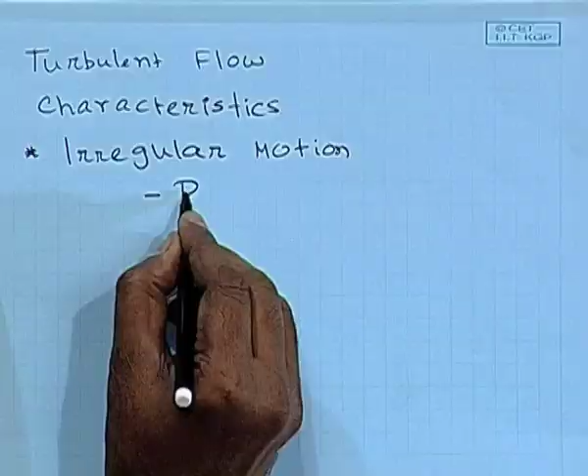The turbulent flow, and first we will do some introduction of turbulent flow. Now, let us look into some of the characteristics of turbulence. First one, it means irregular motions. Turbulence is basically an irregular motion, and there are random fluctuations of the velocity field with respect to time.

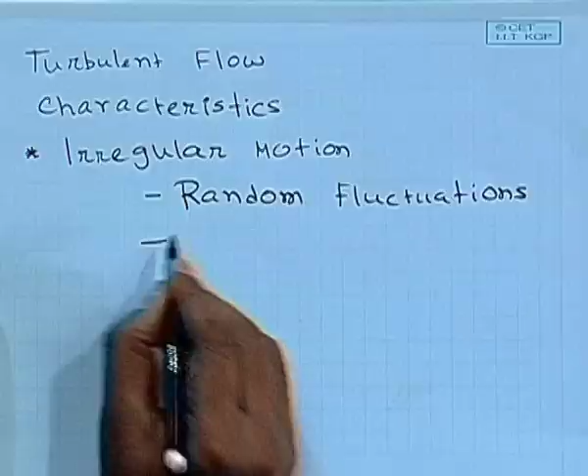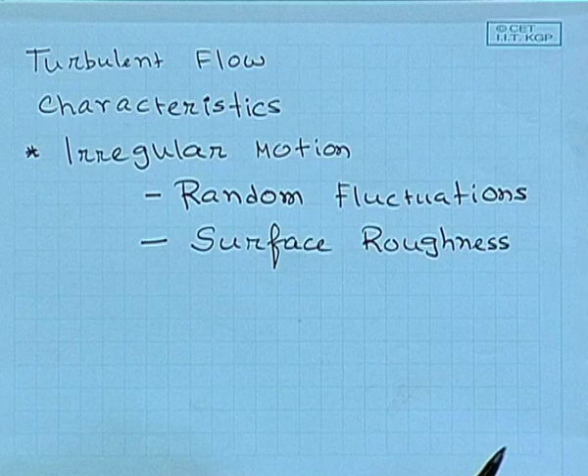Now, what are the origins of these random fluctuations? It may come from the surface roughness. What is the surface? It is basically the confining conduit through which the flow is occurring. It is basically the wall surface roughness. And secondly, the fluctuation may be due to the difference in velocity of the adjacent fluid layers.

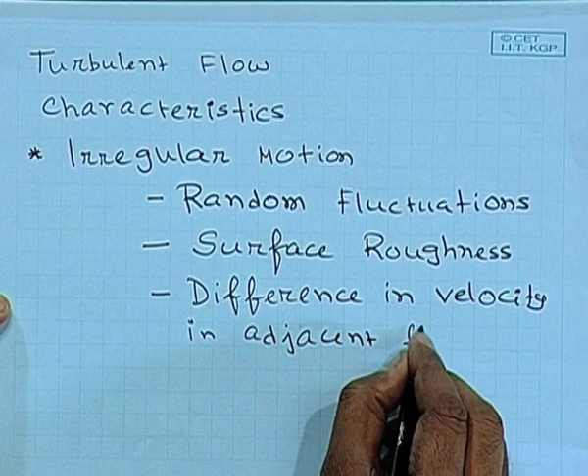Okay. Now, this fluctuation can grow with time or it can decay with time. Under what condition will it decay with time? The viscous forces may dampen the fluctuation. Close to the wall, it is highly expected that the eddy currents in the turbulent flow will be less prominent and the viscous forces will be dominant.

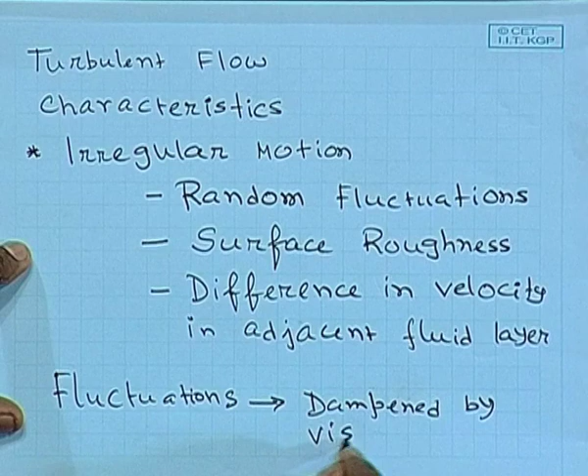Okay. So fluctuations may be dampened by viscous forces, or it may be magnified. How does it get magnified? It may take energy from the free stream velocity and the fluctuation may grow with time.

Okay. Now, how do we understand whether the fluctuation will be dampened, and what is the quantitative criterion by which you can say it is a turbulent flow? Whether the irregular fluctuation will increase or decrease with time is dependent on a dimensionless number. All of us know about that. That is the Reynolds number. There exists a critical Reynolds number.

Okay. Typically the critical Reynolds number is 2000 to 2200 for a flow through a tube. And it is in the order of 10 to the power 5 for flow over a flat plate. Now, if your operating Reynolds number is less than the critical Reynolds number, then the fluctuation will be dampened by the viscous forces. The viscous forces will be dominant. So, turbulence of the flow will be dampened.

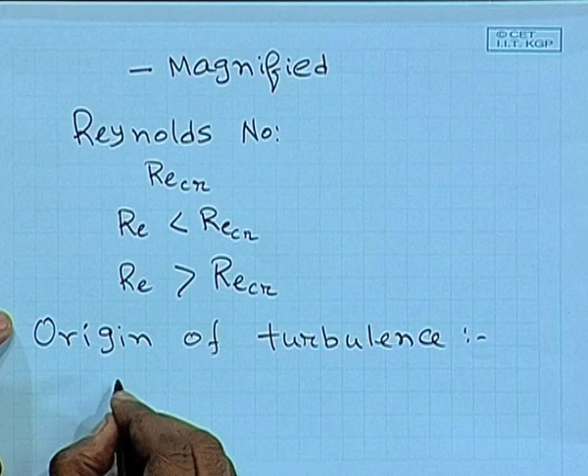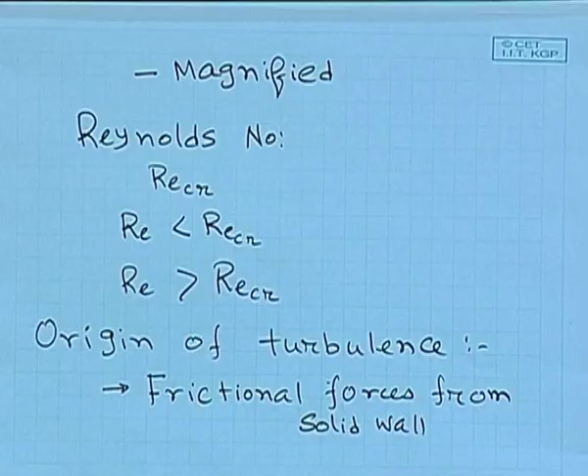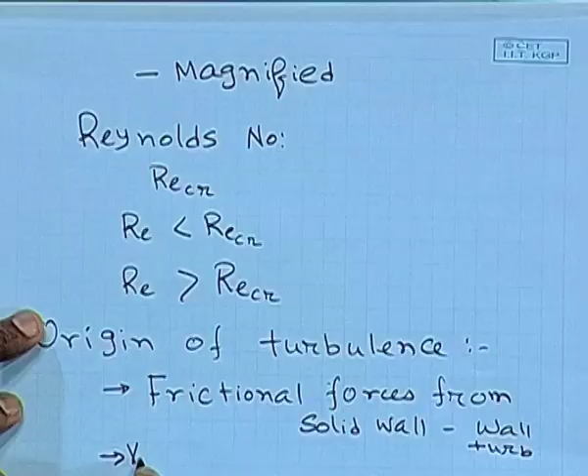Okay. So, let us write down the origin of turbulence. One is what we said, the surface roughness, so friction forces from the solid wall. This is called wall turbulence. It may also be originated by the difference in velocity of the adjacent fluid layers, that is called free turbulence. So, basically these two are roughly the origin of the turbulence.

Let us discuss what turbulence does. Turbulence means there is a lateral mixing of the fluid particles. So, it will give you a better mixing. And it gives you an additional diffusive effect, right. Suppose there is a flow in the x direction, in the axial direction, it gives better mixing in the normal direction. So, that is physically what turbulence does.

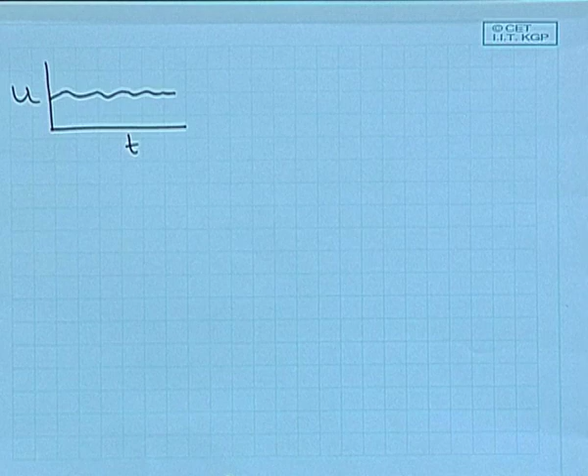Now, let us look into some schematics of the velocity field. If you plot u versus t, for a completely fully developed laminar flow, you will get almost a constant velocity, and this velocity u is basically the area averaged velocity. There may be small fluctuations, but those are basically measurement errors.

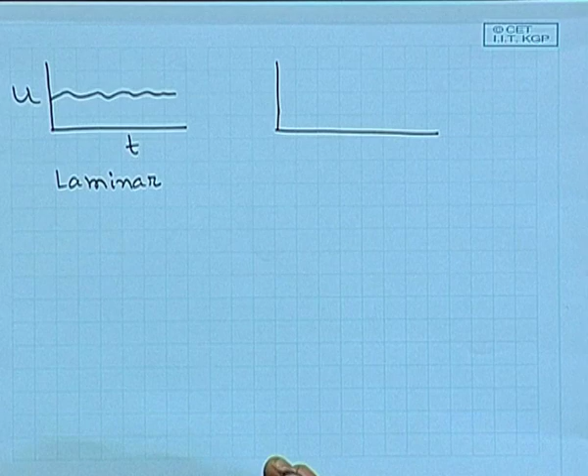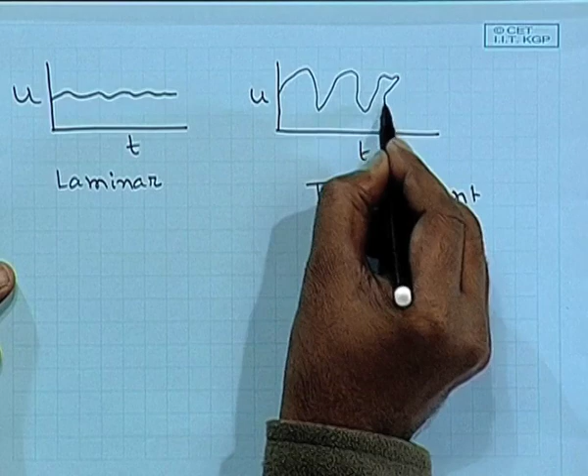Now, for the turbulent flow, you might get random fluctuation about a mean point. All kinds of fluctuation. And this is basically the mean velocity around which the velocity will be fluctuating. So, in the turbulent flow, you will have two parts: the mean velocity, and a time dependent fluctuation imposed on the mean velocity, something like this, and this fluctuation is absolutely random.

It is very difficult to quantify this fluctuation. So, later on what we will be doing, we will be basically exactly like the laminar flow, we got the velocity profile by solving Navier-Stokes equation. The equation of motion will be slightly modified for the turbulent flow, and your aim will be to find the velocity profile under a turbulent flow.

In order to get the velocity profile under the turbulent flow, you have to quantify these random fluctuations. Now, since these fluctuations are entirely random in nature, how will you quantify this fluctuation? That will be one point.

Now, there are two approaches. First approach is by using the chaos theory. This is a total chaotic condition, this fluctuation. By using chaos theory, you can quantify this fluctuation.

You can propose several models, empirical models, semi-empirical models, meaning you do some experiments and relate the terms with the operating conditions, etc., and propose some empirical models for extra terms that will be appearing in the Navier-Stokes equation. What we will be seeing later, in the form of the Navier-Stokes equation under turbulent flow, there will be extra terms appearing in your equations known as the Reynolds stress terms. The origin of these Reynolds stress terms is from the random fluctuation of the velocity field.

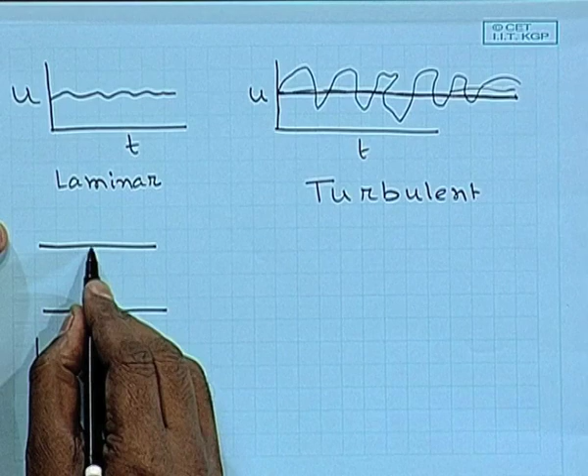Suppose there is a flow through a conduit, it may be a circular conduit, that means a tube. For the laminar flow, you will be getting a parabolic profile for a fully developed velocity field.

For the turbulent flow, you will be getting a profile something like that. There will be a sharp increase very close to the wall, because at the wall you will have no-slip, zero velocity, then velocity will be increasing continuously. You get a sharp increase in velocity very close to the wall, and then that velocity will be almost constant throughout the whole cross section of the tube.

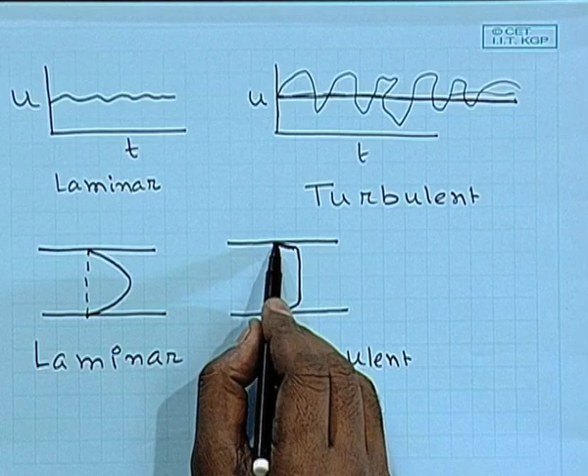Why is this sharp? Because viscous forces are dominant close to the wall, and less dominant in the middle of the channel or tube, since the fluid particle there may not experience the existence of the wall. But in contrast, for laminar flow, viscous forces are dominant entirely throughout the cross section of the channel.

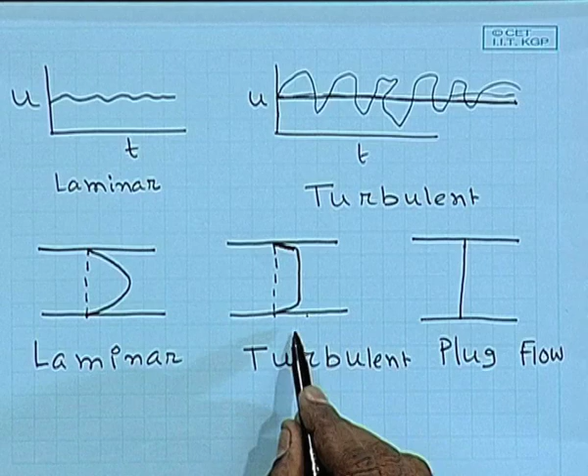This is known as the plug flow. Here the velocity is assumed to be constant throughout the channel. So, this is the velocity profile for fully developed laminar flow, this is for fully developed turbulent flow, and this is entirely a plug flow velocity profile, meaning the velocity profile is constant. Here u varies as 1 minus y-square by r-square, or y-square by h-square, and here it varies with a certain form.

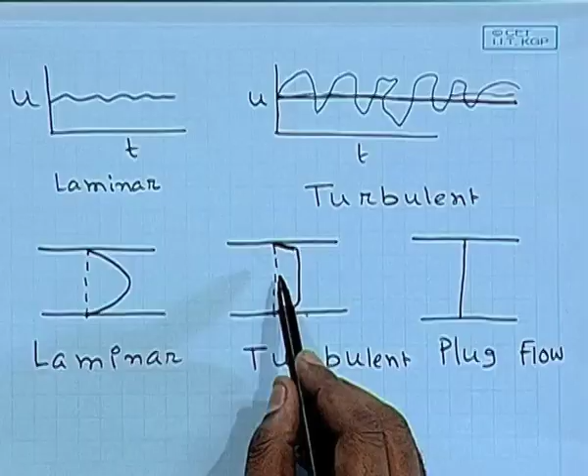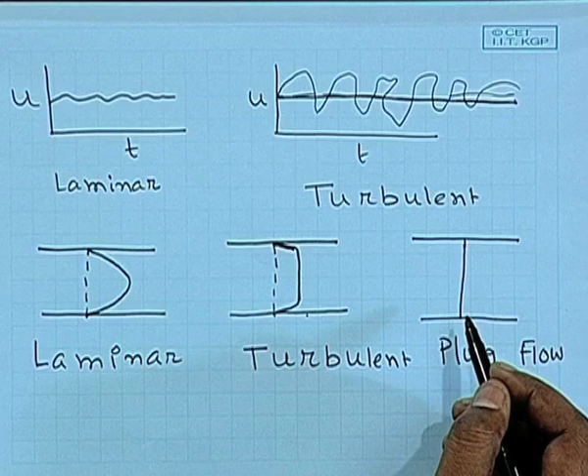It will not be a function of y, it will be independent of y. A typical example may be the flow of toothpaste, which is basically plug flow. Liquid metals also exhibit basically plug flow.

So, in turbulent flow, is the Reynolds number less than critical Reynolds number? No, greater than critical Reynolds number, because if it becomes less than critical Reynolds number, the viscous forces will be dominant, dampening will occur, and turbulent fluctuation will be dampened.

So, the best way to understand whether the flow is laminar or turbulent is to compute the Reynolds number and check whether it is greater than or less than the critical Reynolds number. The critical Reynolds number is around 2200 for flow through a tube, and around 5 into 10 to the 5 for flow over a flat plate. So, based on that, you can make your judgment.

Now, let us quantify the mean motion and the fluctuation. Let us say for a parallel flow, parallel flow means flow through a rectangular channel or flow through a tube.

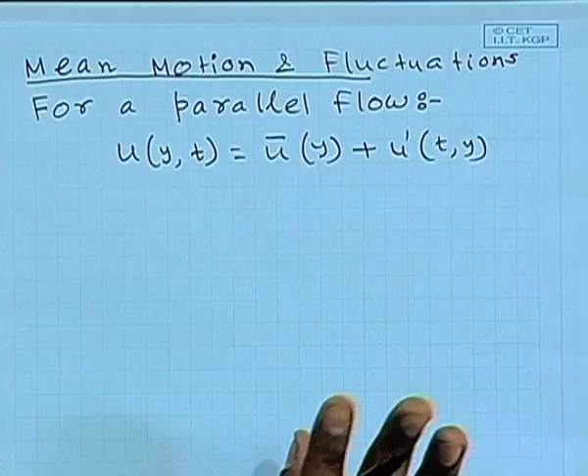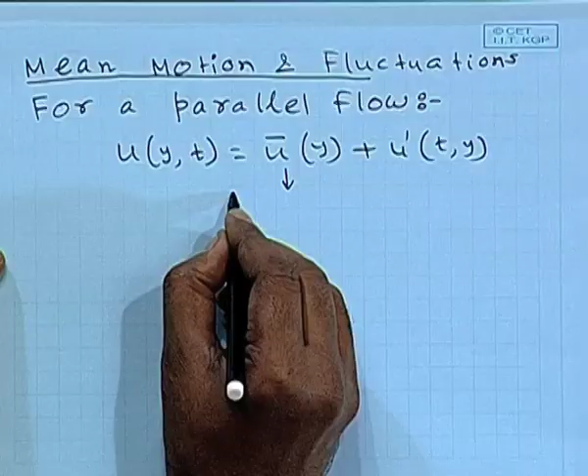Your u as a function of y and t may be expressed as having two components. One is the mean velocity, which we have seen is the mean velocity around which the fluctuation will occur, and u prime is the time varying fluctuation. So, this is basically the time averaged part, and this is the time varying part.

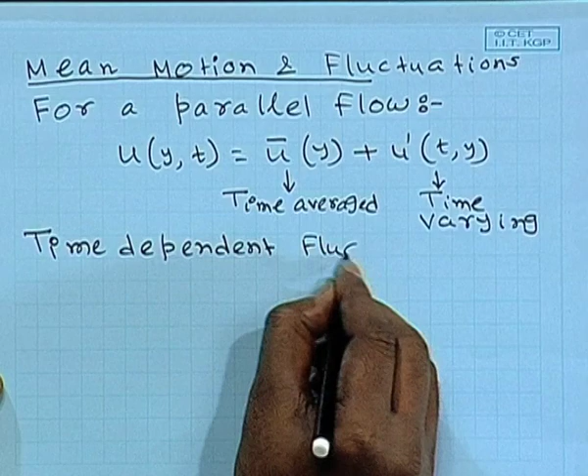Now, how to quantify the time dependent fluctuation? The definition is, over the long term the time dependent fluctuation will not contribute anything to the bulk flow. In the short time it might have some effect, but in the long term it won't have any effect on the mean bulk flow.

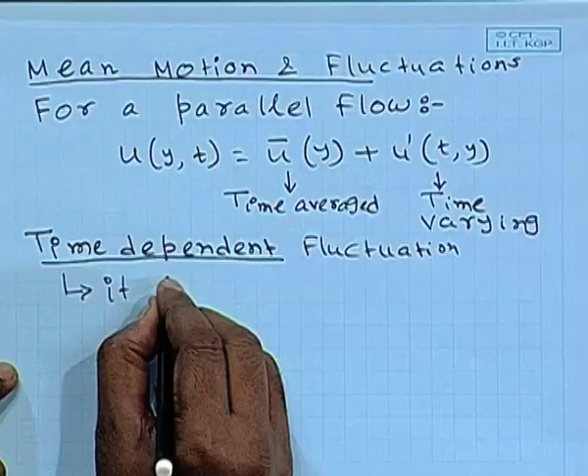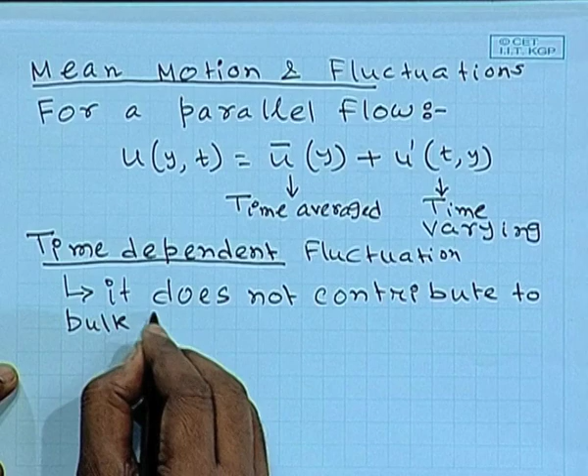That means the integral over minus t to plus t, some time period, of u prime dt will be equal to 0. That will be one of the assumptions.

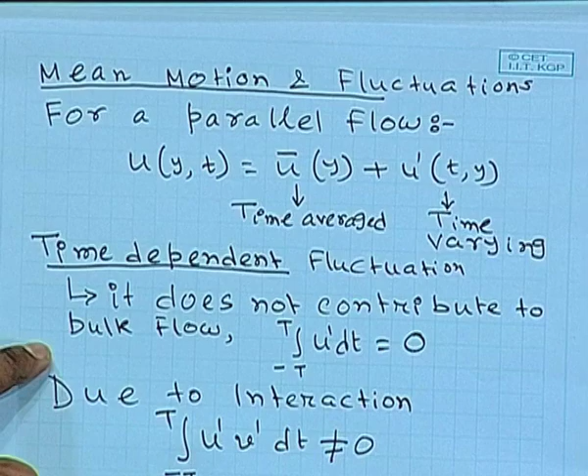But the turbulence will grow due to interaction of the velocity fields. So, due to interaction, the interaction terms of the velocity field will exist. That means the interaction term, the product of u prime and v prime, the integral over the time period will exist, and that will represent the turbulence in your flow field.

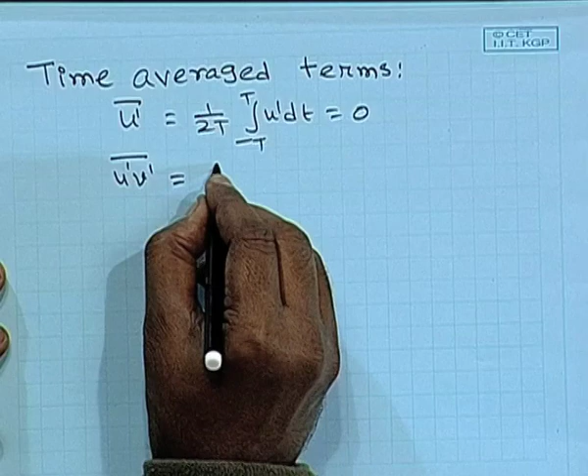So, let us write down the time averaged quantities, the time averaged terms. U prime bar must vanish due to its definition. This bar is basically averaged over time. The time average of u prime v prime will exist.

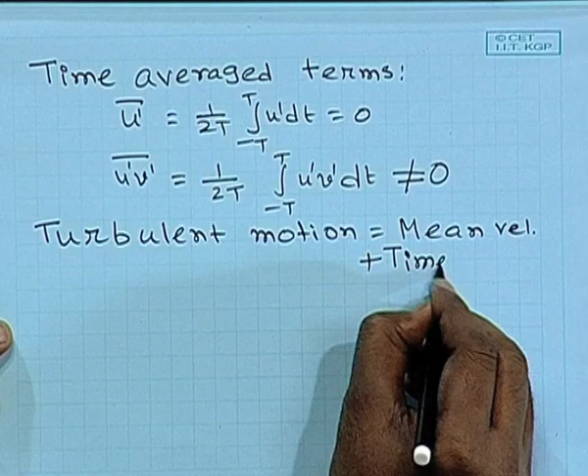So, basically we quantify our turbulent motion as a summation of mean velocity plus time dependent fluctuation. So, we write down different velocity fields in terms of this mean part and time dependent fluctuation. One will be u bar plus u prime. U bar is basically the mean velocity and u prime will be the time dependent fluctuation.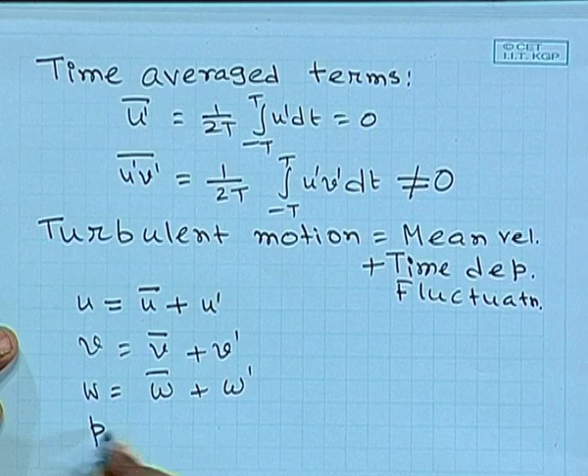V will be v bar plus v prime. W, the z component velocity, will be w bar plus w prime. Pressure will be p bar plus p prime. All the dependent quantities will be divided into two parts: one is the mean time averaged part, another is the time dependent fluctuation. All these dependent terms will be a linear combination of this time independent part and time dependent part.

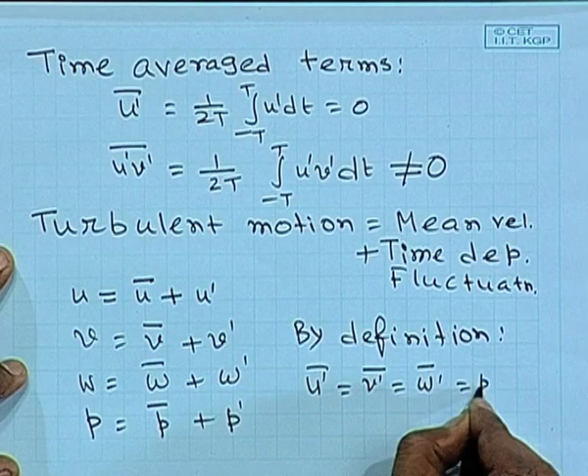And by definition, the time averaged quantities of all these time varying parts will be equal to 0. That is by definition.

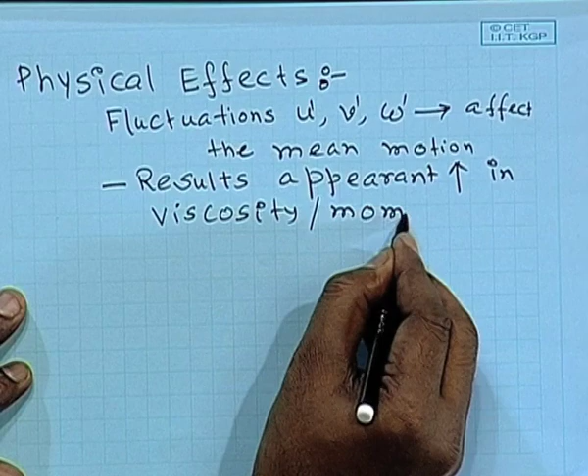Now, let us look into the physical effects. Let us try to define how it affects a system physically. These fluctuations u prime, v prime, w prime will affect the mean motion in a certain way, and it results in an apparent increase of viscosity, as if. It results in an apparent increase in the viscosity or the momentum diffusion.

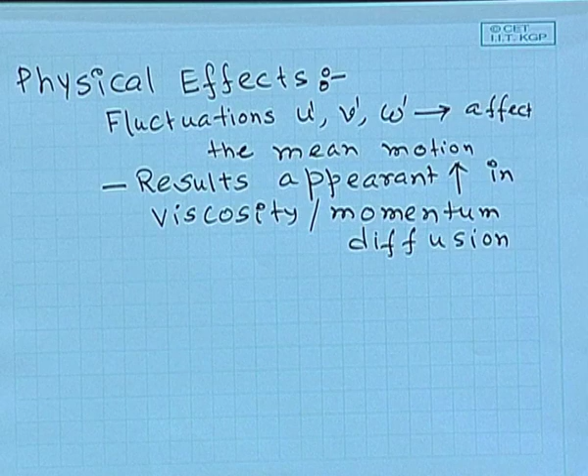Now, in order to obtain the velocity field under the turbulent flow conditions, there are certain algebraic rules that have to be followed. These are known as the Reynolds rules for time averaging.

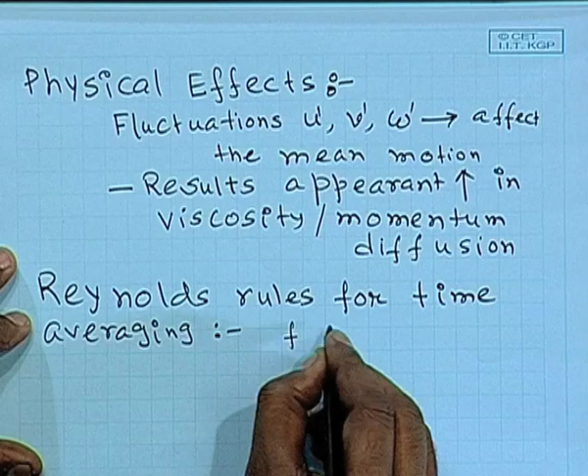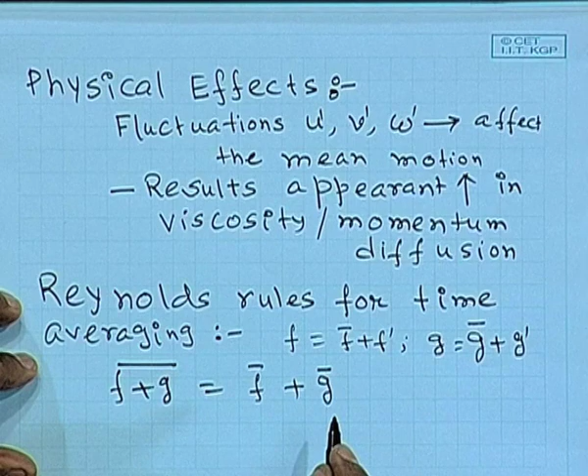Now, if you have f as f bar plus f prime, and g is another quantity, g bar plus g prime, then the time average of f plus g will simply be the time average of f plus the time average of g. Time average of c, a constant scalar multiplier multiplied by f, should be c times the time average of f.

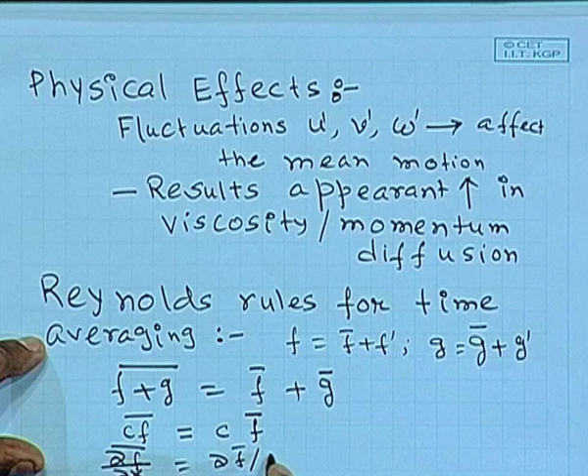Time average of del f del x should be the differentiation of the time averaged quantity of f with respect to x.

And this is important, this will give you the interaction term, time average of f and g. You just substitute f as f bar plus f prime and g as g bar plus g prime and do the calculation. You will get bar of f bar g bar plus f prime g bar plus g prime f bar plus g prime f prime.

Now, if you open up these time averaging quantities, this will boil down to f bar g bar plus the time average of f prime g prime, because when you open up this time averaging, the time average of f prime individually will be equal to 0, since g bar is always constant with respect to time. It is already time averaged, so it is independent of time. So, by definition, f prime bar and g prime bar will be equal to 0. So you will be getting this result, which will be important for the cross terms.

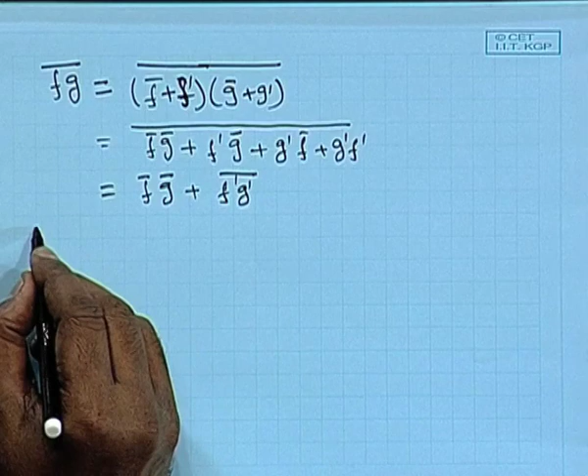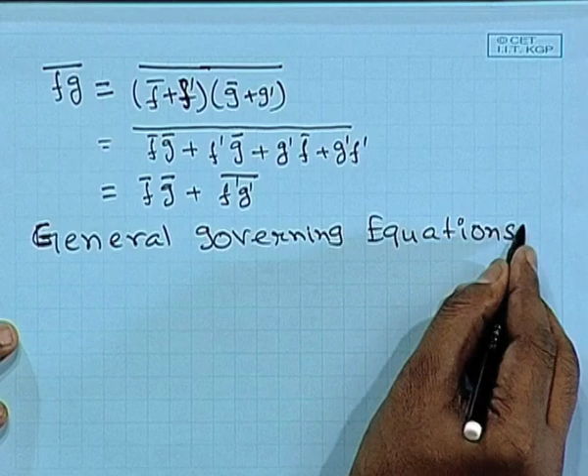Now, let us look into the general governing equations to quantify the velocity profiles under the turbulent flow condition. Let us look into, for the first instance, incompressible flow.

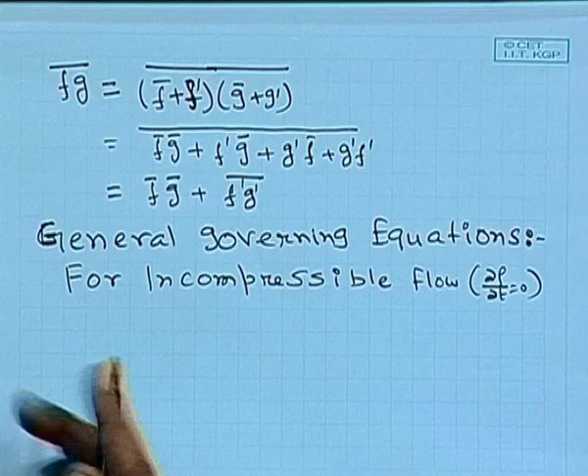That means rho is independent of time, rho is constant, basically your density is constant. And the governing equations for any velocity field, as we have discussed previously in the previous semester, will be considering 4 equations as far as the velocity field is considered. One is the equation of continuity, second is the x momentum equation, y momentum equation and z momentum equation. These 4 equations will specify the velocity field.

You will be having only one equation, that is the energy conservation equation in the differential form for the temperature field, and you will be having n minus 1 number of differential equations for an n component system for the concentration profiles. And what is the last one? The last one will come from the overall material balance.

Whenever you are doing a practical problem, you will see it is very difficult to match the material balance. If you write down n number of concentration equations, species balance equations, then you will see that you cannot match the material balance. Then no one will buy your idea in your plant, because you are putting in some material and getting some material after reaction, maybe it is a reactive system. So, the total material that is coming in should be the total material that is going out in terms of kg per hour, and in most of the cases you will be considering a very costly material. So, if there is some mismatch in your material balance, it precipitates a very high consumption of your money. It will alter the cash flow.

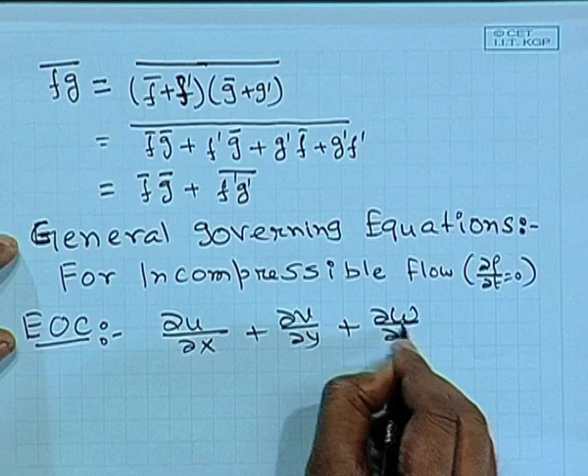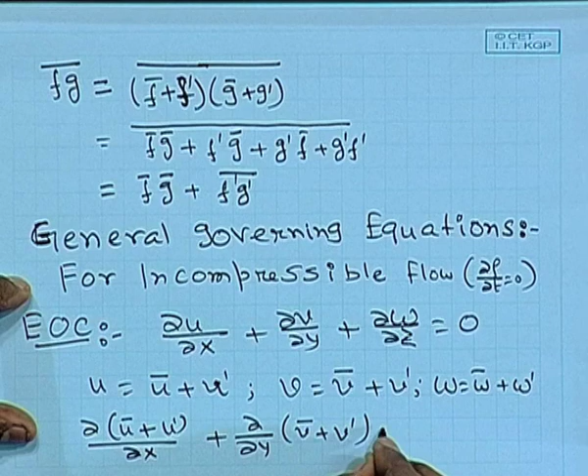So, we write down the equation of continuity. It will be simply del u del x plus del v del y plus del w del z for your equation of continuity. Now, you substitute u by u bar plus u prime, v by v bar plus v prime, and w by w bar plus w prime, and substitute these terms there. So, you will be getting del of u bar plus u prime by del x plus del y of v bar plus v prime plus del z of w bar plus w prime equal to 0.

Right. Now, take the time averaging of the previous equation. Whenever we are talking about time averaging, this is basically long term time averaging, but in the short term there will be fluctuation of the velocity. It is like a flock of birds flying. Generally it will be having a motion in a particular direction with a mean velocity, but within the flock there will be minor variation of the magnitude and direction of the velocity of each individual bird.

But overall the flock will be having a mean velocity in a particular direction. The mean velocity is the one we are discussing, and the intermediate fluctuations will be basically the time varying fluctuation, and these two will be superimposed and it will be giving the turbulent motion.

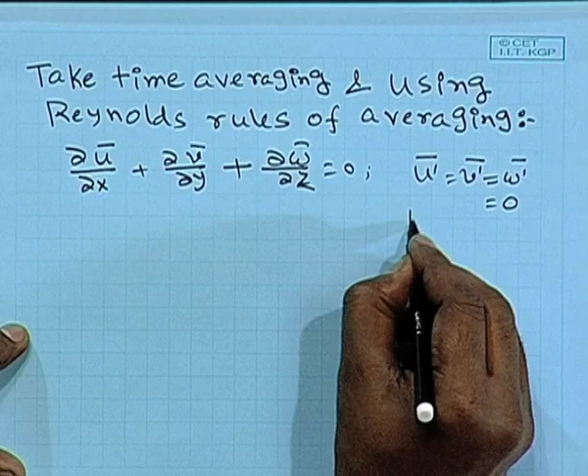Now if you take the time averaging of the previous equation and use the Reynolds rule of averaging, you will be getting del u bar del x plus del v bar del y plus del w bar del z equal to 0, because u prime bar, v prime bar, w prime bar is equal to 0 by definition. Is that clear how you got this? You take the time averaging of the previous equation.

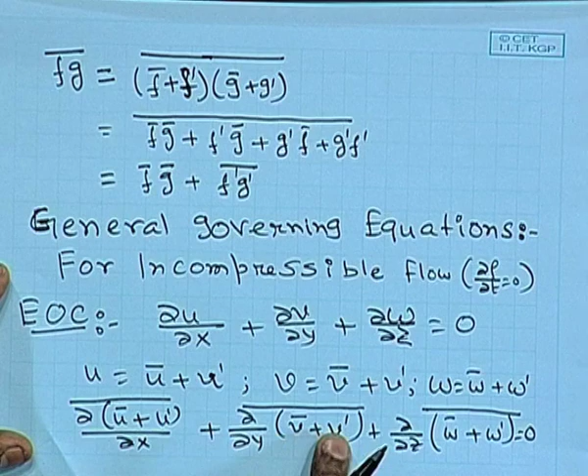In this equation, you take the time averaging, so it will be like this, right. Now you go to the first rule of Reynolds averaging rule. So it will be a summation of u bar and u prime bar. Bar of u bar will be obviously u bar, because that will be constant, and bar of u prime will be u prime bar, the second term. So u prime bar is equal to 0 by definition, v prime bar will be equal to 0 by definition, and w prime bar will be equal to 0 by definition.

So you will be getting del u bar del x plus del v bar del y plus del w bar del z equal to 0 as the equation of continuity for the turbulent motion. So basically the equation of continuity will be keeping its form intact compared to the laminar flow, only the dependent variables like the velocities will be time averaged velocities or time smoothed terms.

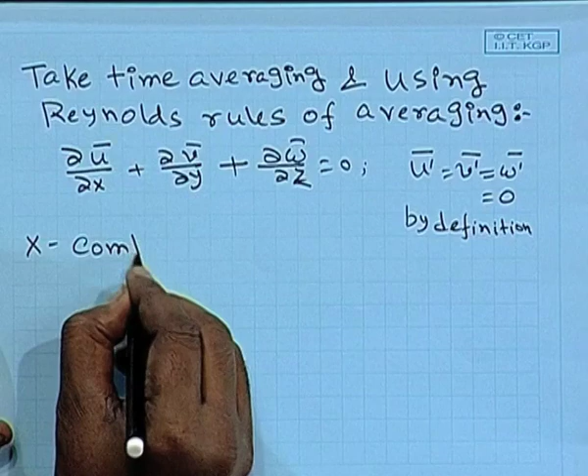Now let us look into the x component equation of motion.

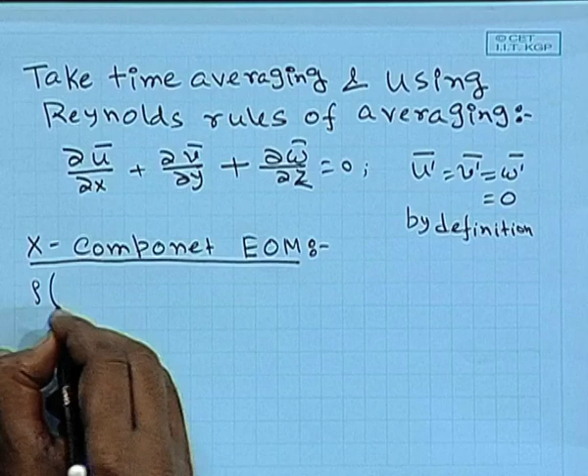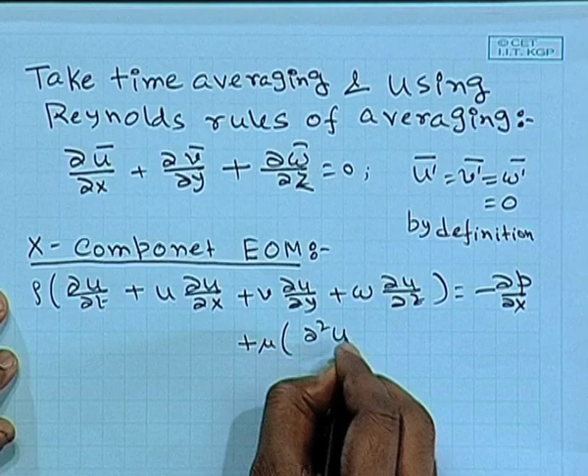Now let us write down the equation of motion: rho del u del t, u del u del x, v del u del y, w del u del z is equal to minus del p del x plus mu times del square u del x square plus del square u del y square plus del square u del z square. And rho gx, let us say gx is equal to 0 for a horizontal flow, so that component will not be there.

So it is basically the inertial term, which will be associated with density, mass, inertia. So it is called inertial term. This is the pressure fluctuation, pressure variation term. These are the viscous terms because they will be associated with the viscosity of the fluid. Pressure term, viscous terms, and we are considering the body force term as zero because we are considering a horizontal flow, so gx, the component of g in the x direction, will be equal to 0.

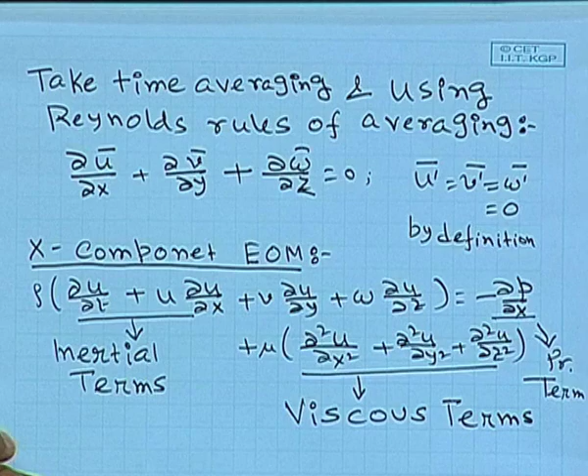Now again you put the definition of u, v, w, p. U is equal to u bar plus u prime, v equal to v bar plus v prime, w equal to w bar plus w prime, p is equal to p bar plus p prime, and substitute and use the Reynolds averaging rules.

I am just writing the final equation because it is a long algebra, and there is no point in doing that algebra here. You can look into any standard textbook like Bird Stewart Lightfoot, or Fox and McDonald, any standard textbook, and you will be getting these intermediate steps.

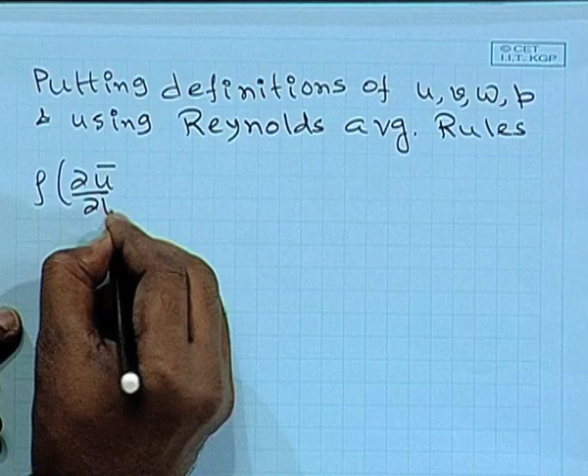So the final outcome will become rho times del u bar del t plus u bar del u bar del x... sorry, this will be v, this will be u... you will be getting the viscous terms: mu times del square u bar del x square plus del square u bar del y square plus del square u bar del z square.

Then you will be getting some extra terms. So, basically you will be getting these extra terms after simplification.

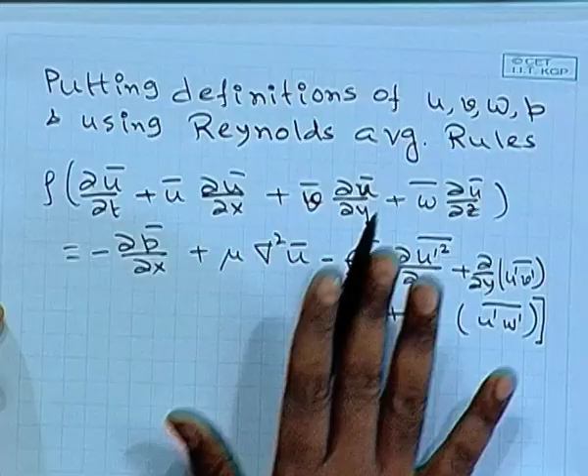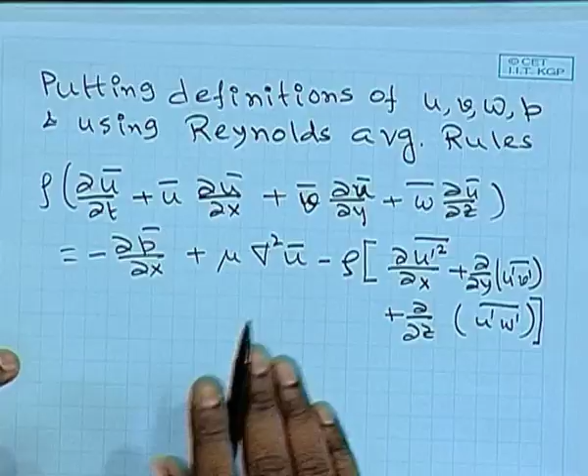So, what is the difference between the x component equation of motion between the laminar and turbulent flow? In the laminar flow, you will be getting up to this part. In the turbulent flow, everything will be identical if you replace the dependent variable by time averaged quantities, and these extra terms will be appearing. There is no way to exactly theoretically quantify these terms. These are called Reynolds stress terms.

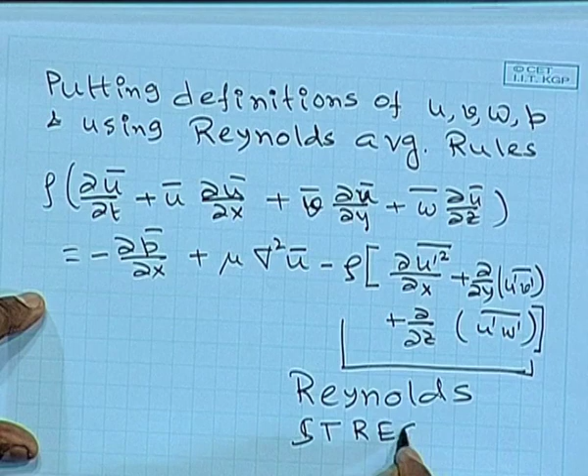There are different empirical relations of these Reynolds stress terms with velocity or velocity fields available in the literature. They are obtained by conducting several experiments and developing correlations between measurements and independent variables. Using these empirical relations, you can substitute them in terms of velocity field, mean velocity field, or gradient of the mean velocity, and then solve this equation to obtain the velocity profile with respect to time as well as position.

No, actually these time fluctuations are basically small time fluctuations. This time is basically long term variation.

If it may be transient turbulent flow, this equation is basically transient turbulent flow. In that case, your mean velocity will be a function of time, and this time averaging we are considering is basically averaging over very small time scales. Like a flock of birds moving in a particular direction, at a different point of time the mean velocity may be different, but the actual internal velocities and their variations with time will not affect the mean velocity. That is our assumption. So this term corresponds to the transient turbulent flow, and this time is basically long term time variation.

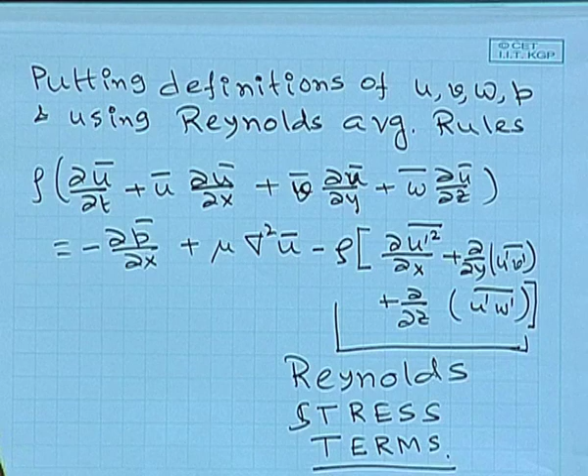Now, we introduce some of the notations. This bar is basically the time averaged. So tau bar xx is rho times u prime square bar.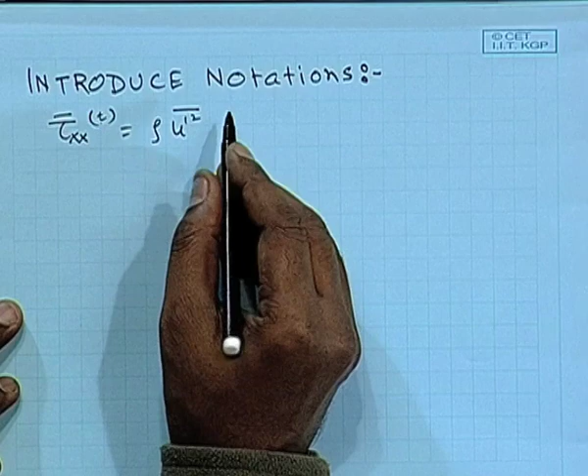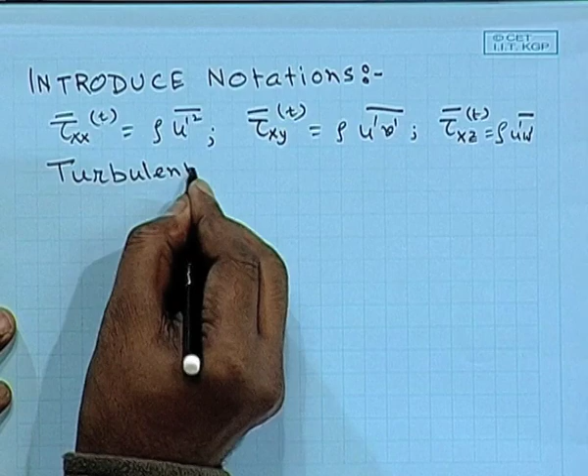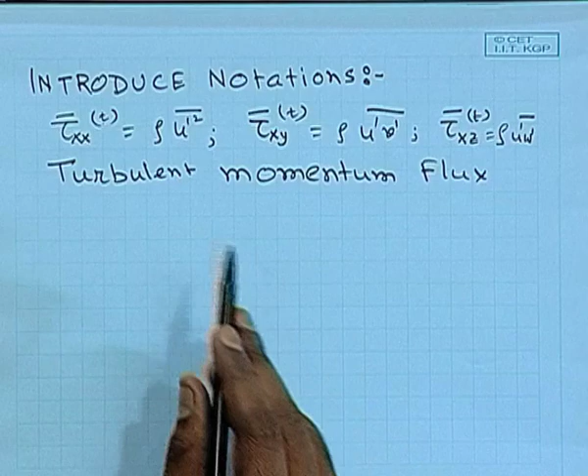These are called the turbulent momentum flux. Look into the similarity with the laminar momentum flux, the shear stress, that is mu times the velocity gradient. Now, the turbulent shear stresses are defined like this.

They are obviously connected to the velocity field, and different turbulent stress terms will be given by correlations with respect to either the mean velocity or the gradient of the mean velocity. So you can write the equation of motion in the compact form.

This is the material derivative. It has two components: one is the local derivative and another is the convective term. This is the temporal one, and the time average pressure, the gradient of shear stress corresponding to the laminar term.

If you simplify this term, it will give rise to mu times del square u bar del x square plus del square u bar del y square plus del square u bar del z square. And these are the extra terms, the Reynolds stress terms, represented by this gradient of momentum flux, the momentum stresses under turbulent flow conditions.

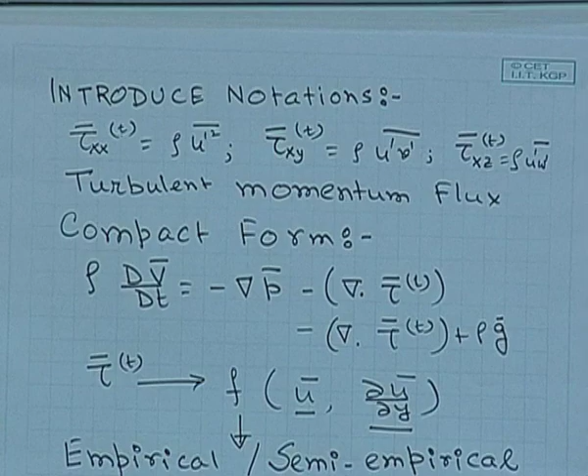So there will be empirical or semi-empirical relations of the Reynolds stress terms available, which will be incorporated in the equation of motion in order to get the velocity field. Now, let us look into some of the semi-empirical expressions.

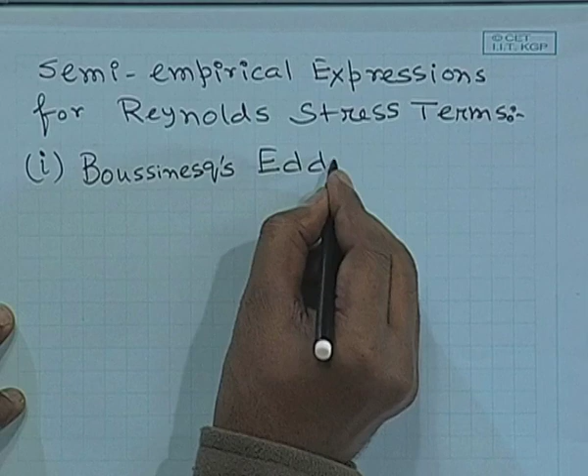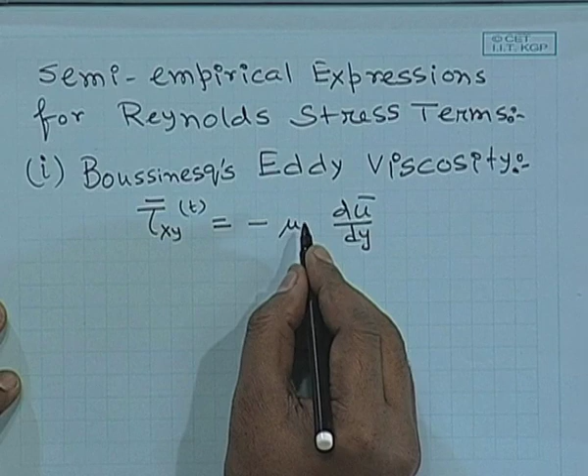The first one we will discuss is known as Boussinesq's eddy viscosity. It simply says, exactly like Newton's law of viscosity, tau xy bar, that is for the turbulent part, will be equal to minus mu du bar dy, and this mu is not for the laminar one, it will be mu turbulent. It is exactly like Newton's law of viscosity.

Now, in Newton's law of viscosity, the viscosity is basically a fluid property. That will be constant, a function of temperature. For an isothermal condition, that will be constant for a particular fluid. It will be a function of temperature as well as the composition of the fluid. So that will be an inherent property of the mixture.

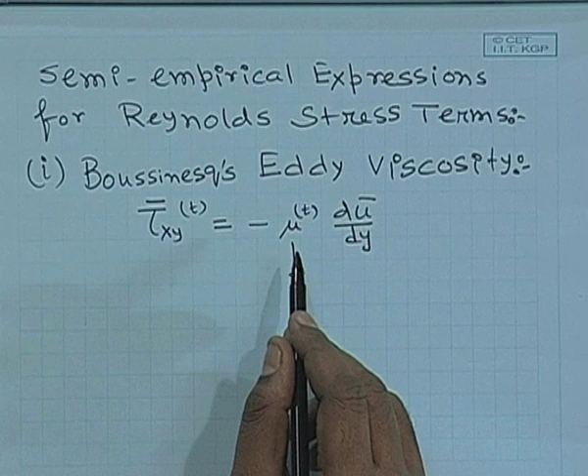Now, this mu turbulent will be a function of location, because this represents the turbulence, and turbulence is absolutely random. So obviously that will be a function of location. And now, how to define that function of location? That is very difficult.

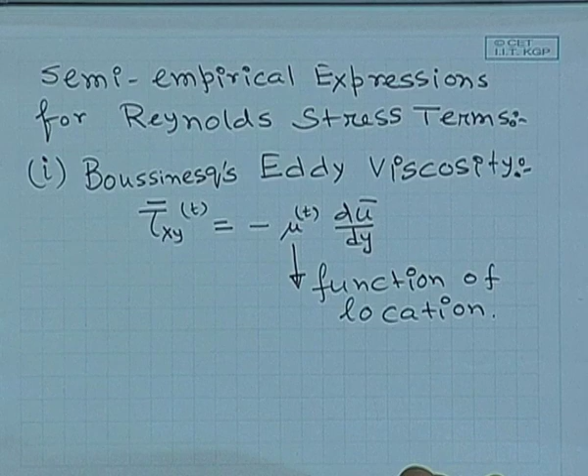So what people do is take some average value of mu turbulent, which will be roughly 10 times higher, or maybe even higher, 10 times, 50 times higher than the viscosity of the laminar fluid. Like for water viscosity, at room temperature it is around 1 centipoise. Mu turbulent may be 50 centipoise, 70 centipoise, 100 centipoise. So some average viscosity will be considered in this equation, and then it will be substituted in your governing equation, then you can solve the velocity profile.

This is exactly similar to Newton's law of viscosity.

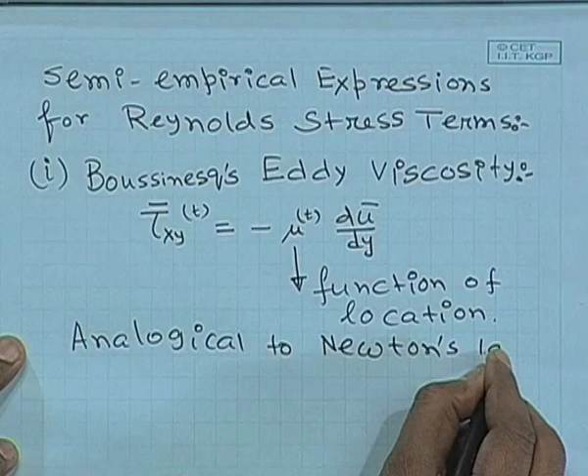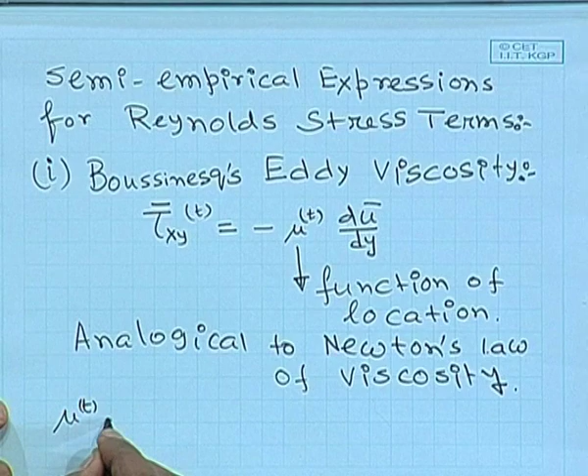Mu t is known as the turbulent coefficient of viscosity, or it is sometimes called eddy viscosity. Once you know the eddy viscosity, you can insert this expression in your governing equation and solve it in order to get the velocity profile.

The second relation we will discuss is well known as Prandtl's mixing length analogy. It is similar to the kinetic gas theory. We assume that the fluid particles, or turbulent eddies, move like random gas particles in the system.

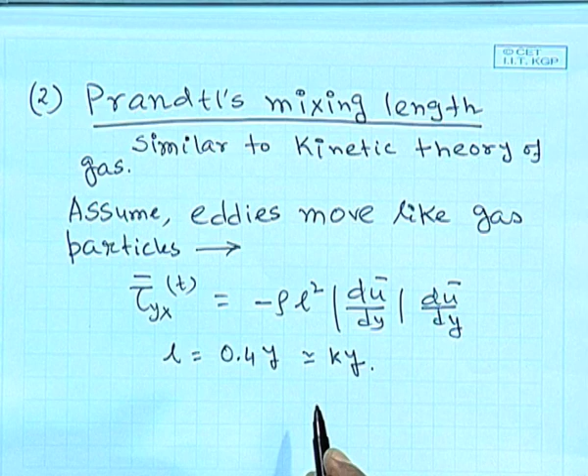Based on the kinetic gas theory, one parameter is called the mean free path. Based on the mean free path, you get the Prandtl's mixing length and the expression for the turbulent shear stress, or the Reynolds stress term: minus rho L squared du bar dy, mod of du bar dy. L is roughly equal to 0.4 y, so L is proportional to y, and this proportionality constant, roughly 0.4, is obtained from various experimental observations. That is why it is called empirical.

So the shear stress here is a function of location as well as the velocity gradient. This can be inserted in your equation, and you can solve it to get the velocity profile under turbulent flow conditions.

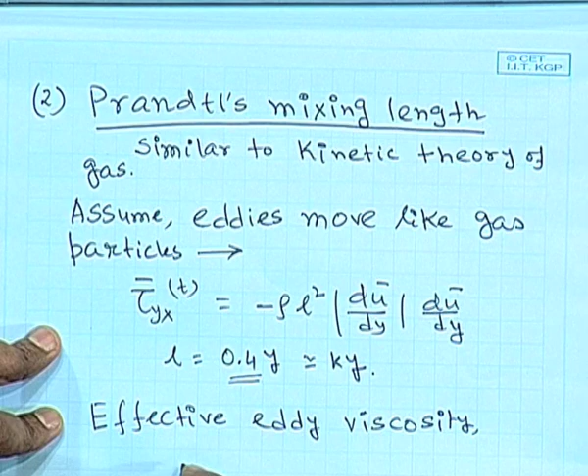So the effective eddy viscosity in this equation will be roughly rho L squared du bar dy. That will be the effective eddy viscosity. The shear stress is equal to mu times velocity gradient, so this will be roughly mu effective times the velocity gradient. So mu effective in this case will be rho L squared du bar dy.

Then one more equation that we will discuss, which is pretty important, is von Karman's hypothesis. It gives another expression of turbulent shear stress in terms of the velocity gradient and the location.

Then there is a relationship close to the wall, because close to the wall the viscous terms will be dominant and the turbulent eddies will be less dominant. That is called Deissler's correlation, valid very close to the wall. So there are several relationships available in the literature.

If someone asks about the accuracy of these equations: if you use one equation you'll get one solution, if you use another you'll get a different solution, but all will be very close. If you compute any of these four analogies—I will discuss the other two empirical relations in the next class—or compute all four and compare, you will see little difference. The fourth one, Deissler's empirical relation, is generally valid very close to the wall.